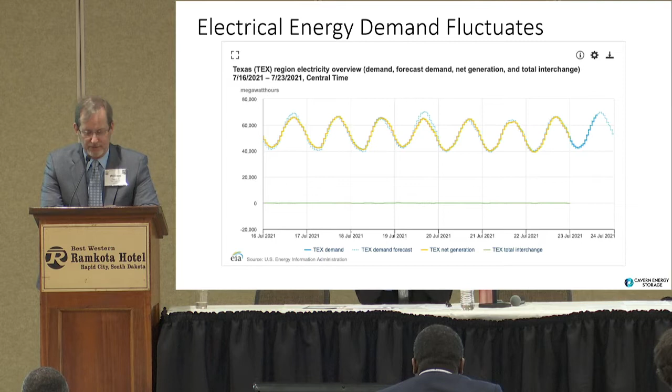Our electricity use fluctuates with demand. As you can see, this is Texas in July. At night, you have low energy electricity use. During the day, when all the air conditioning units are running, you get very high use. It's a nice sinusoidal curve that you get.

Behind the scenes, it looks a little different. You've got your nuclear power plants running at constant power. You've got a little bit of fluctuation on your coal. Your solar and wind is weather dependent, so they're varying a lot. There's solar, there's your wind.

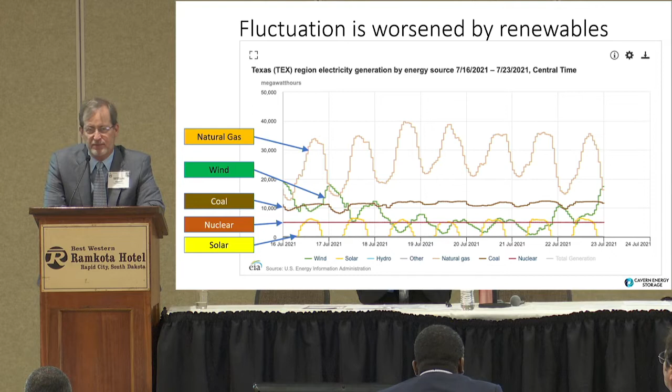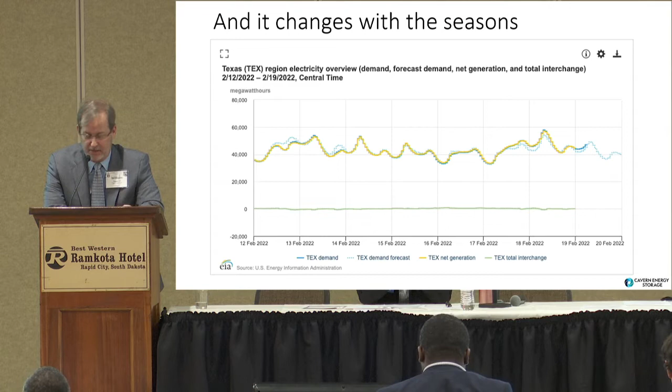The natural gas power generators are constantly changing their power output to match what the other guys are producing and to match up with demand. Now in winter, in February of this year, it was a little different. The sinusoidal curve is gone. It's now dependent on what the temperature is in Texas, and it's semi-steady, kinda. But behind the scenes, it's even crazier.

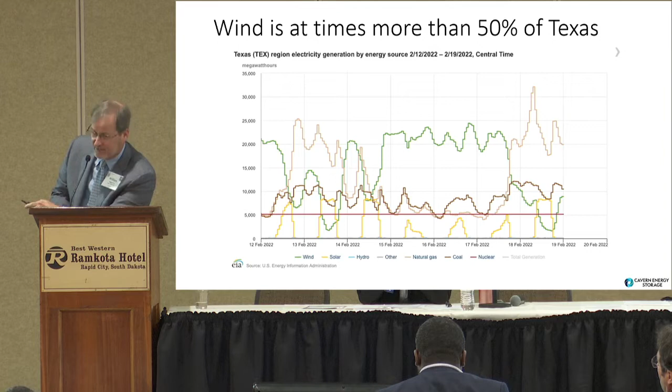Right here, we've got a cold front coming through with a lot of wind. We are 50% wind power at this point in Texas. But here, when the wind drops off, you can see the natural gas power suppliers have to immediately get online and come up to match the demand. So there's a lot going on there.

When you look at the United States electrical grid, we've got 6 major electrical producers. Of those, natural gas, coal, and hydro can adjust to demand. With natural gas, the storage we put in salt domes and depleted reservoirs is our energy storage for that system. For a coal power plant, there's usually a big pile of coal next to it - that's the energy storage. And for hydroelectric, they open and close the gates to turn the turbines more or less.

They can adjust to demand. But then you've got nuclear that can't adjust to demand - if you want to know why, look me up afterwards, I'll explain the whole thing about thermal momentum and why a nuclear power plant doesn't like to change its output. But then you've got solar and wind, and these are weather dependent. As you see, they're almost 13% of America's energy supply, but they change and they vary.

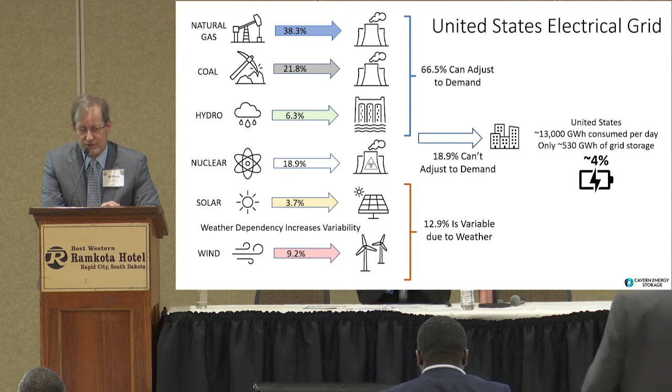When you look at Texas, it's even worse. Your wind and solar is over 28% of your energy supply - that was for last year, 2021. The first 3 months of this year, we've been 34% solar and wind. But we've got less than 0.25% of energy storage presently on the grid, and of that 3 gigawatt hours, it's mainly lithium-ion batteries.

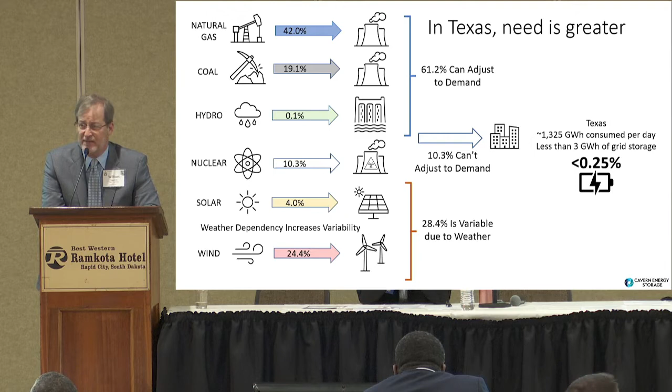The Department of Energy recognizes this. They've formed what they call the Energy Storage Grand Challenge, and the point of it is to find and commercialize new forms of long-duration energy storage to resolve this. DOE estimates that we need about 1,000 gigawatt hours of energy storage to support a larger renewable economy. At the moment, we've only got 26 gigawatt hours of energy storage, compared to over 1,124 gigawatts of power generation.

Of that, 23 gigawatts is pumped storage hydroelectric, and the Department of Energy only estimates that we can probably add about 52 gigawatts to that system. Most of the new installations we're looking at are batteries right now.

So let's discuss what our energy storage options are at the moment. You've got lithium-ion batteries - this is presently what's being developed in most places and most locations. In Texas, we've got 1.6 gigawatts of installed storage, and there's another 5 gigawatts under development. It's about 86 to 88% efficient, and you've got about a 3 to 6 year life for the batteries, which is cycle driven - every time you charge and discharge the battery, that's a cycle. Lithium-ion batteries are cycle limited, you should know that from your phone, because of the way the phone behaves.

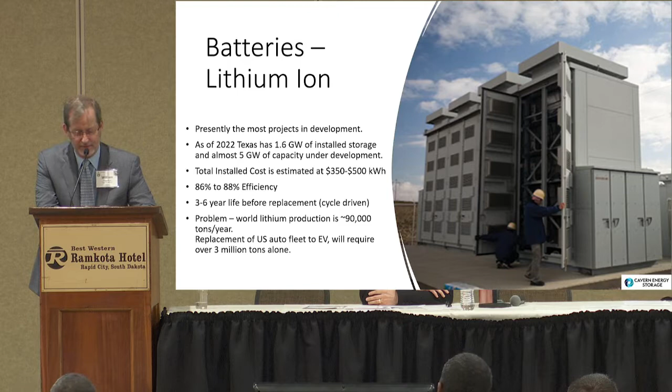The problem is world lithium production is about 90,000 tons per year last year. As we change the US auto fleet over to electric vehicles, it's going to need about 3 million tons of lithium just for that purpose. Now, one of the other problems is the cost of lithium.

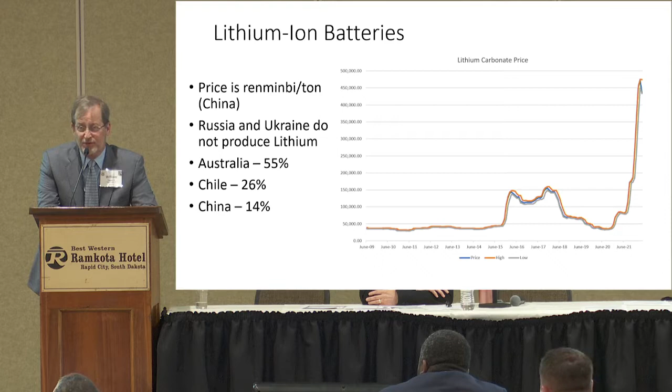The second option we have for batteries is called redox flow. This is a new technology, and there are very few installations. The idea is you have 2 large tanks of electrolyte and you flow them through a cell, and flowing through that cell is where you charge or discharge the battery. As a result, it has a very large footprint. You will never put this in a car or a phone. It is only for grid use, and it's got about 68 to 78% efficiency.

The other option is compressed air energy storage, something this group has talked about. At present, there are only 2 existing large-scale plants, one in Alabama and one in Germany. The Alabama plant is 110 megawatts, and it's only 52% efficient.

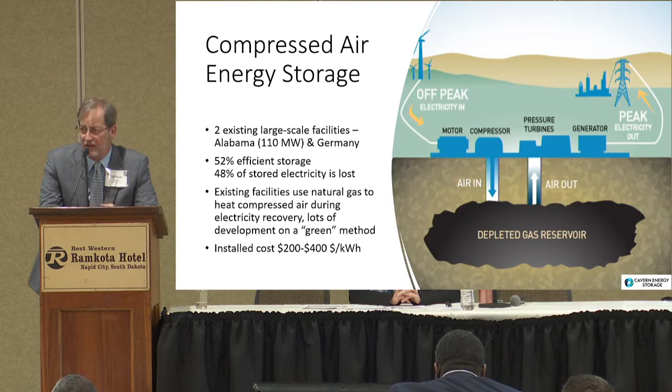The reason is you have to compress the air. Once you compress the air, it gets hot, and once it's hot, you have to get rid of the heat. Then you store it. When you want to get the electricity back, you bring it out of storage and expand it. As it expands, it cools—in fact, it gets very, very cold. The plant in Alabama uses supplemental natural gas firing to heat the compressed air as part of the expansion process, and then you get the electricity. So right now, that plant is not very green; it depends on natural gas for its supplemental heating. There's a lot of development going on about how to store the heat during compression and reuse it during expansion to make the system more efficient and more green, but none of those installations have been built yet.

And now hydrogen. We have a lot of papers on hydrogen coming up because it's the darling right now. But there is no large-scale development and no large-scale infrastructure in place at this time. One reason is that the Department of Energy's own reports say the efficiency is about 35%: if you start from electricity, use electrolysis, compression, storage, expansion, and then back to electricity, you are 35% efficient.

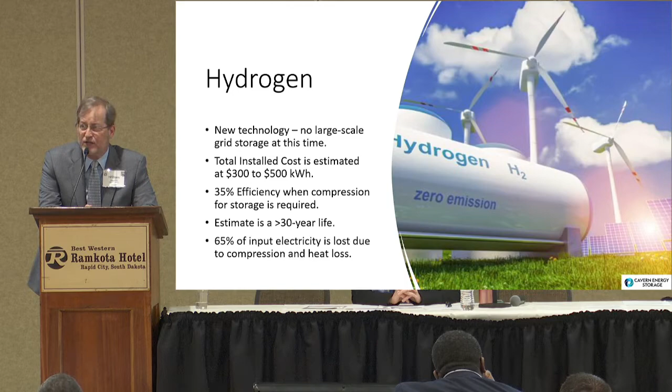And that brings us to pumped storage hydroelectric. This is the workhorse of energy storage, not only in America but worldwide. It is 90% of the worldwide projects; in America, it's 85%, and from a storage standpoint, it's 95% of our electricity energy storage. As I said earlier, there's 23 gigawatts installed, and the DOE figures they can maybe add another 52 gigawatts. It's 80% efficient, one of the more efficient systems on the market today, and the operating life is long—it lasts more than 40 years. There are European installations that have been operating for over 100 years.

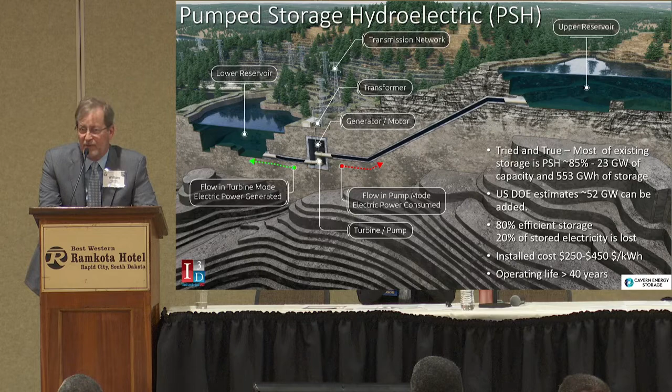This is where our pumped storage hydroelectric facilities are located. The blue dots show where they're at. The red dots are where they're planned, and the light greenish dots are where they've indicated they are planning to build new units. When I mention that 52 gigawatt figure, they are in these areas—mountainous areas—because the way pumped storage works is you have 2 reservoirs on the side of a mountain. When you want to store electricity, you pump water from the lower reservoir to the upper; when you want to recover it, you let that water flow back through a hydroelectric turbine to generate electricity.

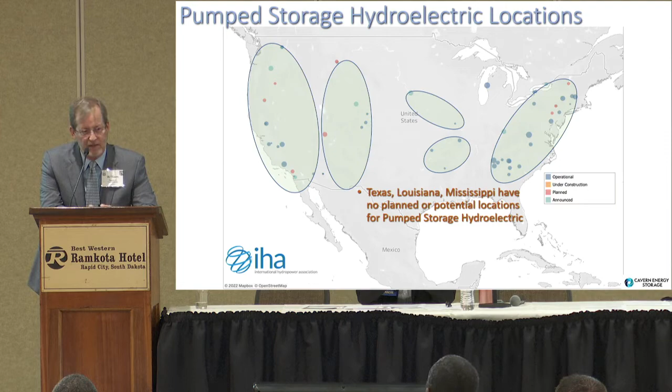Texas, Louisiana, and Mississippi have no existing or planned pumped storage hydroelectric facilities because the land is simply too flat. We're never going to see them in the Gulf Coast region. So what are you going to do about energy storage in the Gulf Coast? Pumped storage hydroelectric needs specific geographic locations with a high elevation difference between water storage reservoirs. Compressed air is inefficient, and hydrogen is even more inefficient. Batteries have limited lives, and their costs are going to start going up as more vehicles convert to electric. So what are our options for the Gulf Coast?

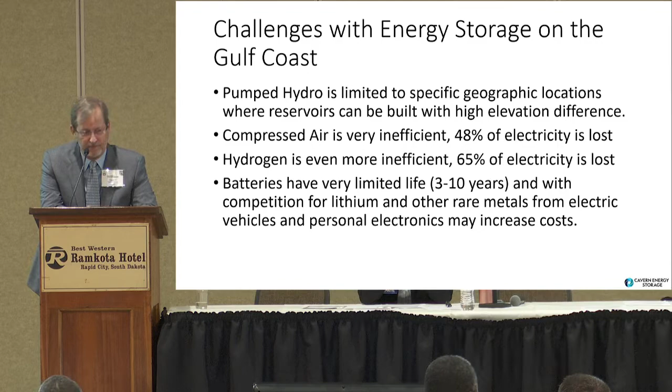And this is where I'm thinking: underground pumped storage hydroelectric, where you take the upper and lower reservoirs from pumped storage hydroelectric and relocate them into a salt dome cavern. You then use compressed air to pressurize the caverns, raising the surface pressures and creating the void spaces within the caverns that you move the fluids between.

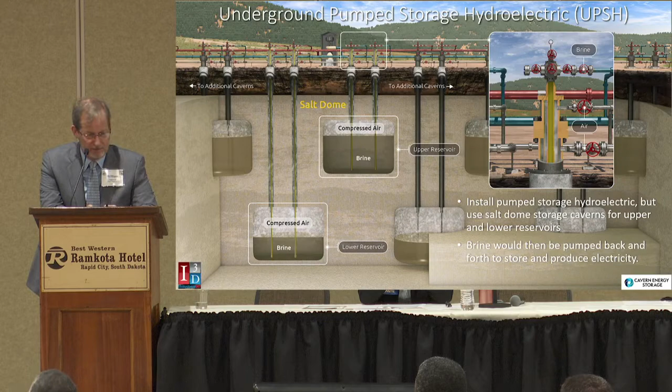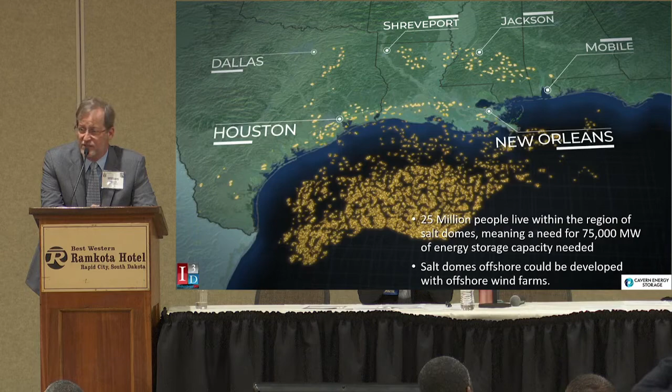Another thing to point out is that as we develop offshore wind farms, there are near-shore salt dome caverns that could be developed in conjunction with them to provide energy storage for those offshore wind farms.

This is not a new idea. There were patents in the 1970s and 1980s where people were already discussing this idea. Some of them did not pressurize the caverns, and as a result they put the powerhouse down in the salt dome cavern. In other cases they used solution mine tunnels to move air and fluid around. None of these were ever built.

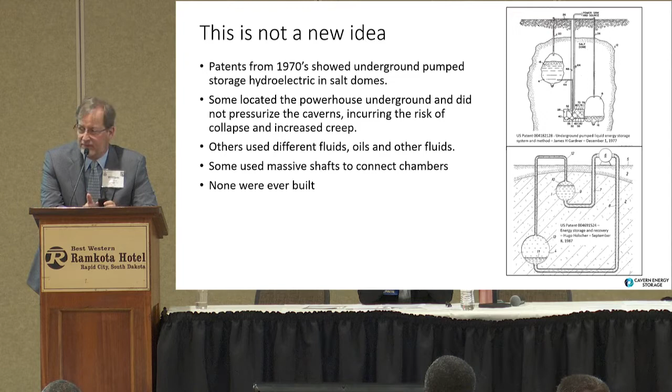So how do we set this thing up? You make two caverns full of brine. You add compressed air to both. The compressed air raises the surface pressure of the brine strings. For the lower cavern, it raises it to about 60 psi, about 4 bar. For the upper cavern, it raises it to about 680 psig—what's that, about 42 bar? I'm having trouble doing that in my head.

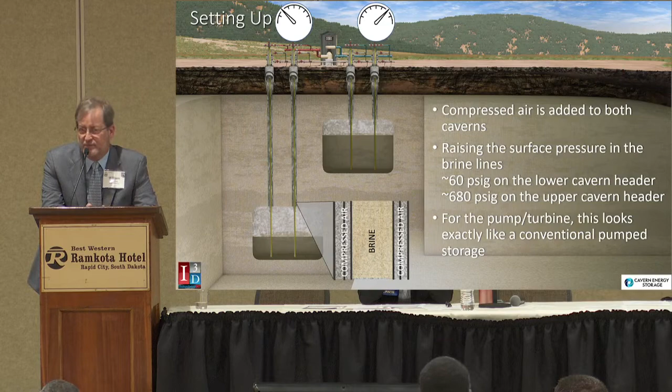For the pump turbine on the surface, this looks exactly like conventional pumped storage hydroelectric. So when you want to store electricity, you pump brine from the lower cavern to the upper cavern. At the same time, compressed air is freely flowing from the upper to the lower to replace the spaces, essentially, flowing through the well bores. The brine flows through the well bore, the compressed air flows through the annuluses.

When you want to recover that electricity, you do the opposite. You let the brine flow through the turbine on the surface down to the lower cavern, and at the same time the compressed air is flowing the opposite way.

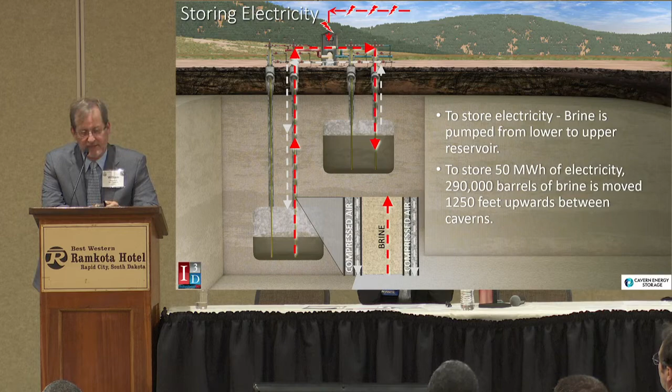Oh, I forgot to mention one thing. To store 50 megawatt hours of electricity, you have to move 290,000 barrels of brine. You've got to move a lot of fluid—keep that in mind, we'll come back to discuss that point. And you're moving at 1,250 feet in elevation as well.

So what we want to do is build an alpha demonstration unit. We want to take two existing salt dome caverns, about 200-foot diameter, over 1,500 feet in height. So if you have two existing salt dome caverns that are very close together and they're not doing anything for you, please contact me. I'd like to know.

So what we're going to do is use the existing wells. We're not going to do anything to the caverns—we're going to receive them and turn them back to you as is, or as close to as is as we can do. And we'll fill them with compressed air.

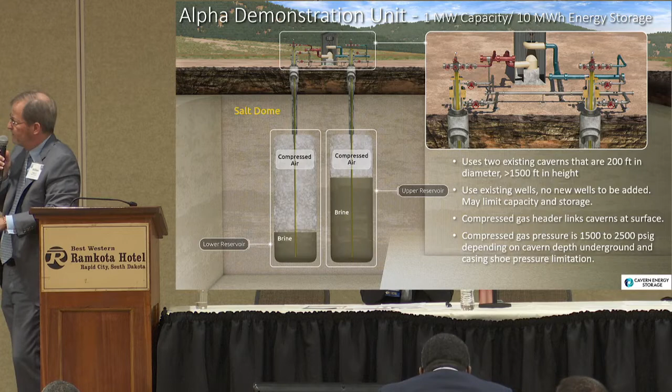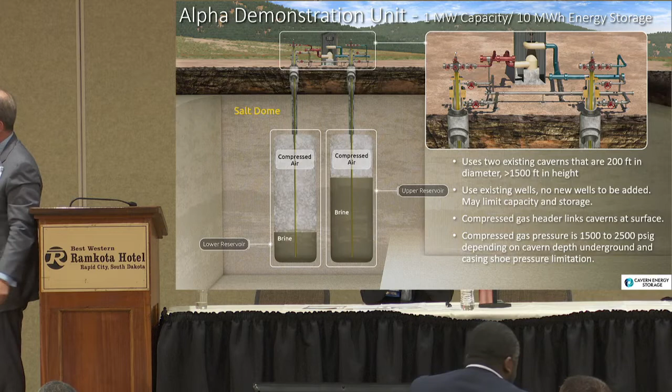So the idea is we would run this for about a year. Now let me point out, this piece here is not being used, and this piece here is just not being used, and it's full of compressed air. By the way, compressed air does not come cheap, so that's extra money right there.

So after a year we would build the beta unit. The point of the beta unit is actually to achieve 80% efficiency and to achieve the energy storage targets that we have.

So we would create 2 new caverns that are 200 feet in diameter, and each cavern is only 250 feet in height. We use multiple wells to penetrate into the caverns. Remember, we were talking about 290,000 barrels of fluid that we have to move for 50 megawatt hours of energy storage. As a result, you need large well bores and multiple well bores to do it. Again, we add compressed air to get the system to work.

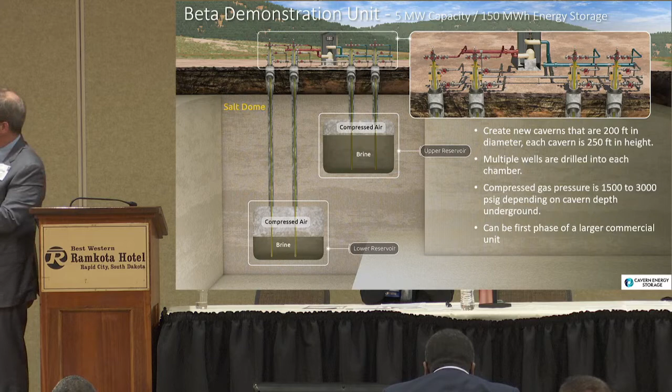This design of 2 200-foot caverns could be the first phase to a commercial unit. This is a 5 megawatt capacity. It can put instantaneous power on the network, and it stores up to 30 hours of electricity, so it has 150 megawatt hours of energy storage.

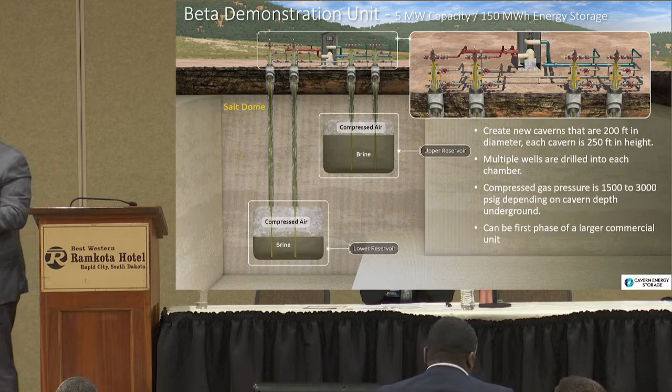When I take multiple caverns like that and link them together, I get this situation. This is 25 lower level caverns and 25 upper level caverns. 5 uppers and 5 lowers are ganged together in headers. They tie to a 25 megawatt pump turbine. There are 5 of them. You now have a 125 megawatt power installation on 90 acres of salt dome.

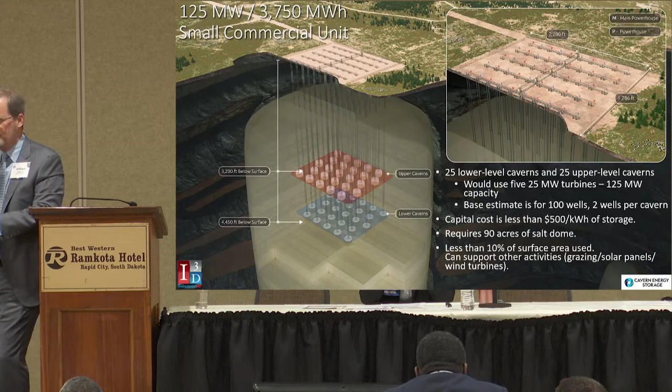The capital cost is in line with other large-scale energy storage systems as well. The surface area, we use less than 10% of the surface area. You could have grazing, solar panels, wind turbines. You can use the surface area for other applications.

This would be what the plan view would look like. So you've got blue caverns in the upper level, green caverns in the lower level, and the black boxes are the powerhouses on the surface. It's 200-foot caverns with 200 feet of separation at each level and a 100-foot border on the perimeter. These are assumptions I've made.

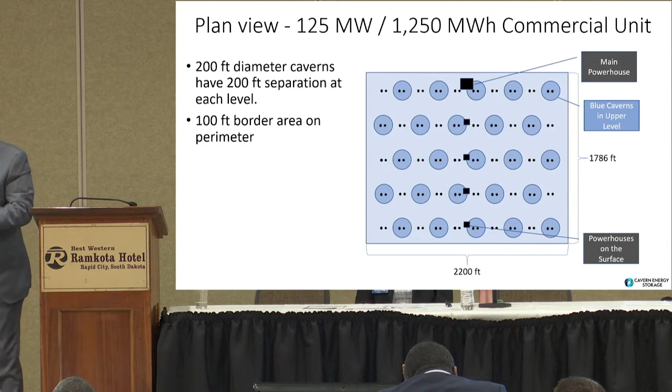Okay, so for any new technology like this, there are challenges. What are they? Well, the first one is obvious: we're choosing to use saturated brine because it's the most economical working fluid. As a result, that gives us challenges around material. Most pumped storage hydroelectric facilities use water, there's a few that are using seawater, but because we're using a saturated brine, we're going to look at the metallurgy very carefully.

We're looking at austenitic and duplex stainless steels at the moment. The wells in the dome are going to be exposed to compressed air and brine. We're worried about that. Existing cavern operators, we would love to have conversations with you and find out what your experience has been with different metallurgies, because we're looking to find the best system that will give us corrosion resistance versus cost. We're looking at a 40 to 50 year design life here.

The other thing about saturated brine is it has the potential to precipitate out salt in the equipment. The goal here is going to be to maintain the brine temperature to match the cavern temperature as closely as possible to prevent any precipitation of salt in the surface piping or the surface equipment. We'll be insulating the pipes. We may add some supplemental heat. That's something that's being looked at at the moment.

Inspection and monitoring during the alpha and beta demonstration units is going to be critical for us to confirm how we keep salt from depositing on the top side. The other concern there is if salt is being deposited in the surface piping and equipment, then you've got a subsaturated fluid going back into the cavern that could leach additional salt off the walls. That would also interfere with our 50-year design life.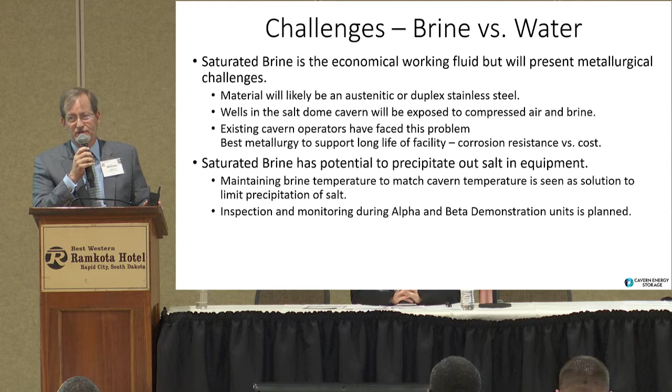One of the other challenges is cost. So the DOE target is $50 per megawatt hour. Now that's $50 between when you buy the electricity that you're storing at night when electricity is not in demand, versus the price you pay when you release that electricity back to the grid when there's high demand. The DOE is targeting a $50 difference.

So Texas in 2020 averaged $22 per megawatt hour. But in 2021, and this is only if you exclude the February freeze that was absolutely insane, you have about $39 per megawatt hour. And for the first 3 months of this year, it's run at $48 per megawatt hour. So the $50 target that DOE is aiming at is now starting to be seen in the Texas market. It's come up to that level.

Now the challenge is underground pumped storage hydro needs more than $50 per megawatt hour to be profitable. But the other thing in our favor is all the other large-scale energy storage systems have the same issue. They all need more than $50 per megawatt hour. The whole point of the Department of Energy challenge is to try and get all the large-scale systems down to $50 per megawatt hour. But we do have an advantage in that area.

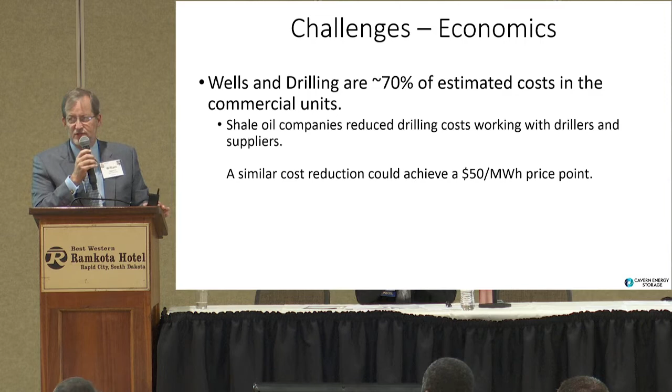Wells and drilling are 70% of the estimated cost in the commercial units. Shale oil companies were able to get their drilling costs down by working with drillers and with suppliers. If we can see a similar cost reduction in this system, we could get down to the $50 per megawatt hour price point.

So what's our path forward? If you have two existing salt dome caverns in close proximity to each other, I want to talk to you, because that's what we're looking to do next: build the alpha demonstration unit. We're looking for private investors and electrical grid operators to generate capital investment. We're working with pump turbine suppliers on possible metallurgy and confirming cost and delivery schedule, and we're working with drilling companies to confirm size and cost of the wells needed for the beta unit and commercial units.

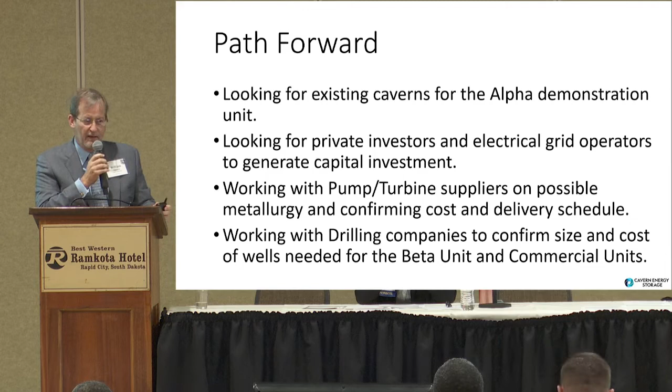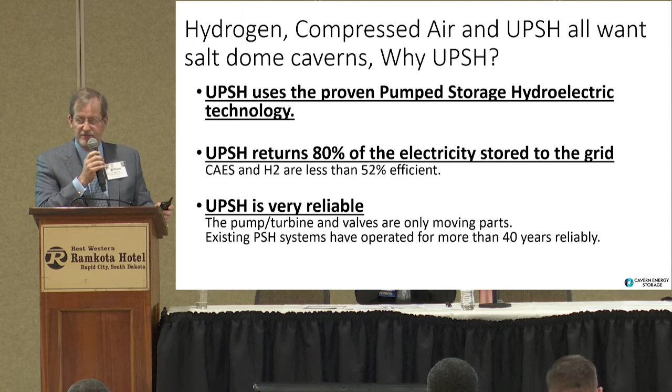Now, hydrogen, compressed air, and underground pumped storage hydro all want salt dome caverns. So why pick underground pumped storage hydro? First, it's using the proven technology of pumped storage hydroelectric, the workhorse of present energy storage. Second, its efficiency is 80%. Compressed air and hydrogen are 52% or less. And we expect underground pumped storage hydro to be very reliable. It has very few moving parts, only the pump turbine and the valves. Existing pumped storage hydro systems have run reliably for 40 years.

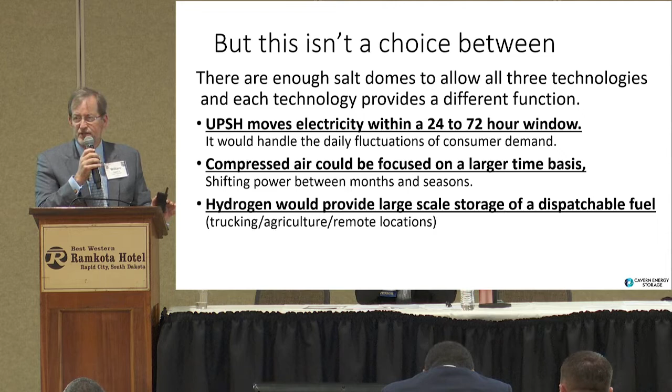But this isn't a choice between them. There are enough salt domes to allow all three technologies to be implemented, and each technology provides a different function. Underground pumped storage hydro moves electricity within a 24 to 72-hour window. Compressed air could be focused on larger time bases, storing energy for seasons and months. And hydrogen gives you large-scale storage of a dispatchable fuel that could be used in trucking, agricultural, and remote locations. These are three separate tools in the toolbox, and we really need all three to make the system work.